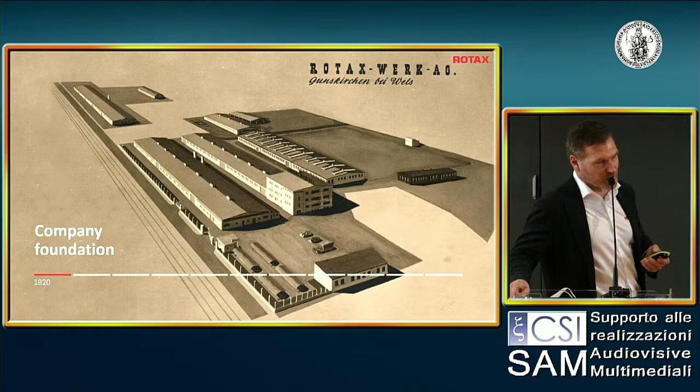We are just going through some of the most important events for the aircraft sector. There have been a lot of other events, but it would be too long to cover. So, foundation in 1920, and in 1970, the first time we made a joint venture with the Canadian company Bombardier. That was the start for the aircraft section.

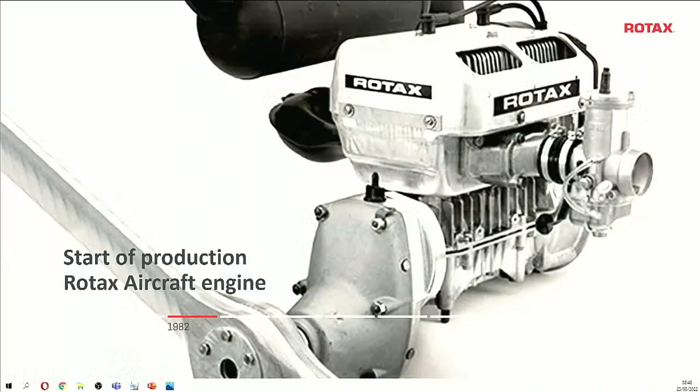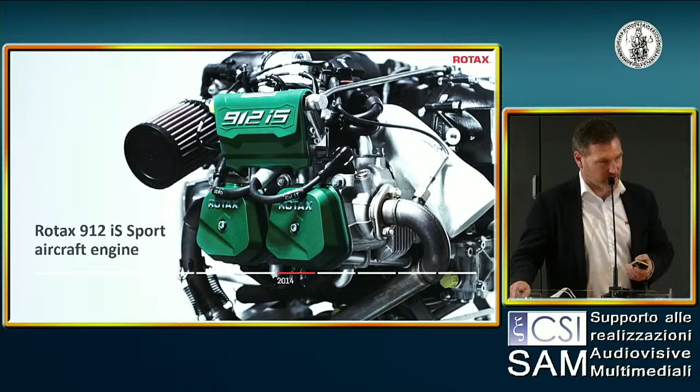In 1982, we established the first aircraft engine by itself. In 2003, there was a big change in the company structure. Bombardier sold our business out and created a completely new company called BRP. Since this time, BRP Rotax, the name, was established. In 2014, we brought on the market the first fully electronically injected engine, the 912 IS Sport, and quickly after.

In 2015, already the 915 IS engine. With this engine, we participated in this H3PS project. And of course, for our customers, we wanted to make a present in 2020. We created a special limited edition of our engine. Only 200 pieces were sold. It was limited. This edition was a 915 IS engine, but with a different style, different design, and of course included different services.

In the meanwhile, over the last 10-15 years, as we came together to become the BRP Rotax company, we became a company listed on the Toronto Stock Exchange and the New York Stock Exchange.

We get your heart beating, yeah. That is the main claim that our employees live for. That is the driver for their motivation in the daily business. We always want to get the heart of our customers beating. Since the beginning, that is what we are working for, our goals and our personal motivation.

Okay, I think pictures say more than words. So that was it, we can continue with the next.

What are our core markets? I think it has to be clarified. We are one of several engine manufacturers. Our core markets are in the fixed wing, gyrocopter, and helicopter markets, everything up to around 160 horsepower. We are not offering or servicing higher horsepower ranges. In these three markets, we have been working for 4 decades with good success.

Okay, I just want to give you a small insight into where we are focusing and what our goals are. That is the philosophy of our aircraft department from Rotax, independent of the other departments. Since the beginning, we have always focused on having the best quality, and Rotax does not manufacture an engine which is not in the end certified.

So when we are deciding on anything, it has to be premium and best quality. Next, independent of the technology, we want to have the smartest, greenest, most economical, and safest aircraft. We want to have the best service, because everybody knows we are in the 21st century. It's a century of service. Not only the best product makes you successful, it has to be a combination of service and product.

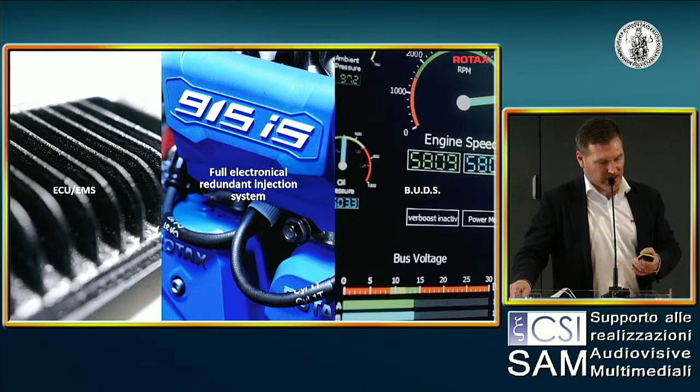That's the reason why we started, several years ago, to work with the latest kinds of technologies to make our products more successful, like engine control units, full electronic redundant injection systems, and the BRP utility and diagnostic software. That's some of many, but for the service centers and the worldwide network, we want to provide the best service to the end customer, and you cannot do everything personally. We try to maintain and educate all our people outside with the latest technology and services, for example 3D technologies, augmented reality, virtual reality. So we already have a mix, so that every end customer all over the world can enjoy the best service and the best educated people.

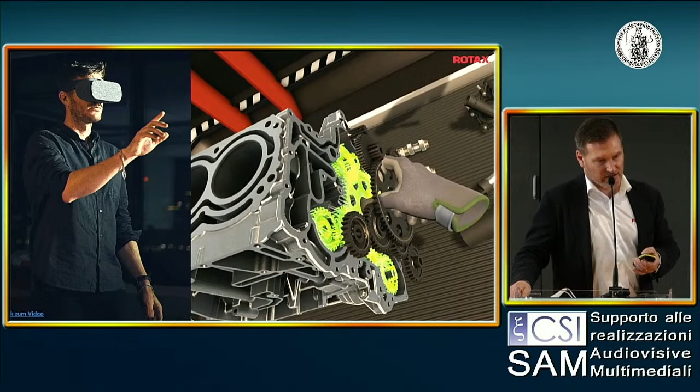So that was shortly the general information about Rotax, but now we have to switch to the main part, and I will hand over to my colleague Dominik Katholnig. Thank you very much.

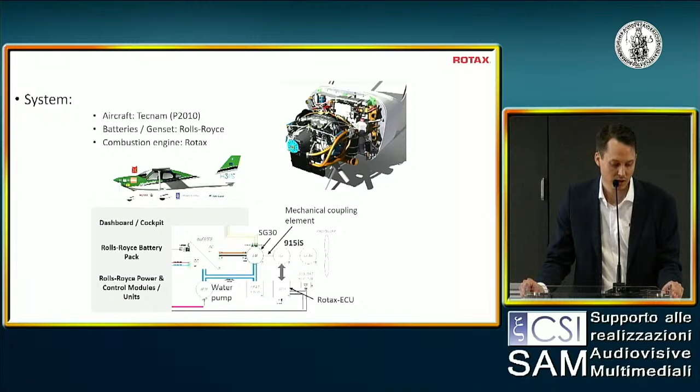On this slide, you can see part of the system architecture. How does that look like? So on the very right side, you can see the propeller. The propeller is driven by the Rotax propeller shaft coming out from the Rotax gearbox. So our engine, the 915iS, does also incorporate this gearbox.

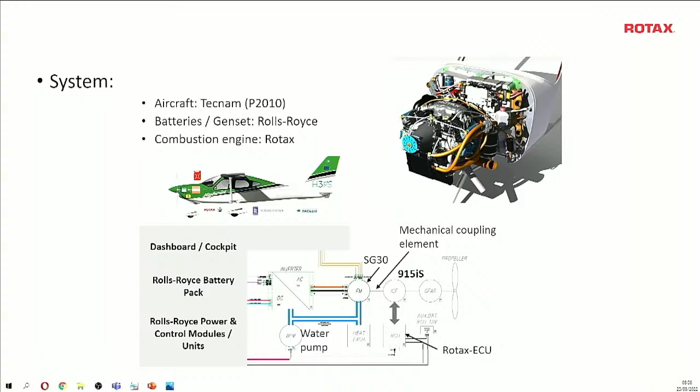And on the left side, you can see the electric system from Rolls-Royce. The electric motor is linked to the internal combustion engine via a mechanical coupling element. And so the power is transferred from the electrical machine to the internal combustion engine, and then via the gearbox to the propeller. About the left side, I will not talk about that anymore, because I will give that to my colleagues from Rolls-Royce afterwards.

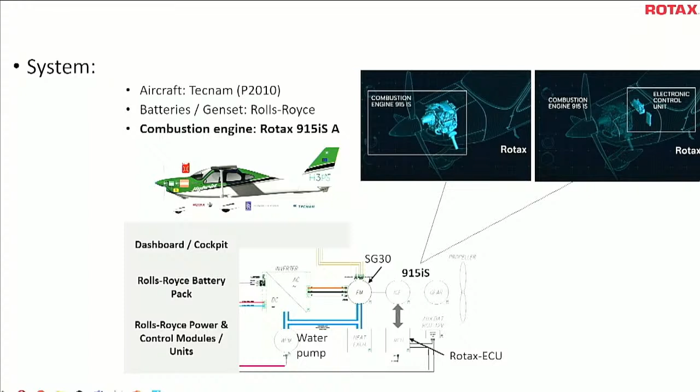Here in these pictures, you can see where the engine, where our 915iS engine is placed under the cowling. And now I come to the mission profile.

So our Rotax 915iS engine delivers 104 kilowatt of max takeoff power and 99 kilowatt of max continuous power. In addition to the 104 kilowatt max takeoff power from our engine, we have 30 kilowatts for 1 minute from the electric booster and another 25 kilowatts for 5 minutes afterwards. And so we boost the takeoff and the initial climb, and then afterwards we go to a recharging phase of 25 minutes.

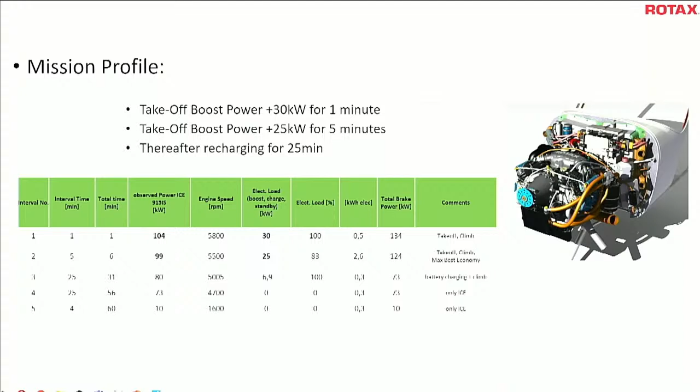Now I will come to the 915iS engine, because I want to focus on our part of this project. So what is this engine? It's a 4-cylinder, 4-stroke horizontally opposed internal combustion engine with a turbocharger. You can see the turbocharger at the bottom of the engine. With this turbocharger we have a critical altitude of 15,000 feet. It's air and liquid cooled, so the cylinder heads are liquid cooled, other parts are air cooled.

And what you can also see here in the picture is the gearbox. On the very right side of the engine, you see the propeller shaft and then the gearbox in black. And with this gearbox, we reduce the engine RPM with a ratio of 2.54 to 1 to the propeller. So if we have a max engine RPM of 5,800 RPM, we then have a propeller RPM of about 2,300 RPM.

About the performance data, we have 104 kilowatt max takeoff power for 5 minutes, and then we have 99 kilowatt max continuous power, which is most of the time also climb power. With a weight of about 82 kilogram, we have a quite impressive high power to weight ratio of about 1.3 kilowatt per kilogram. And with this engine, you can fly up to an altitude of 23,000 feet, which covers most of the VFR flight envelope.

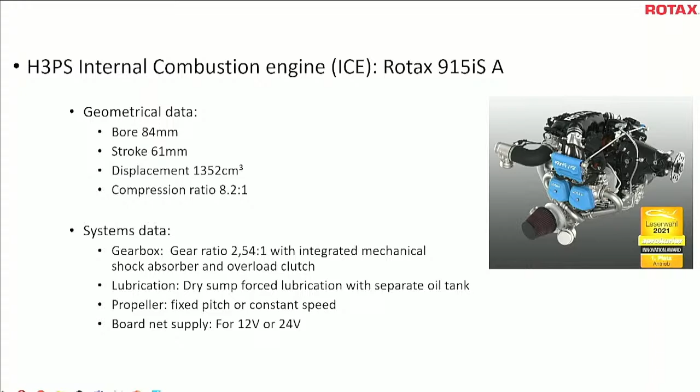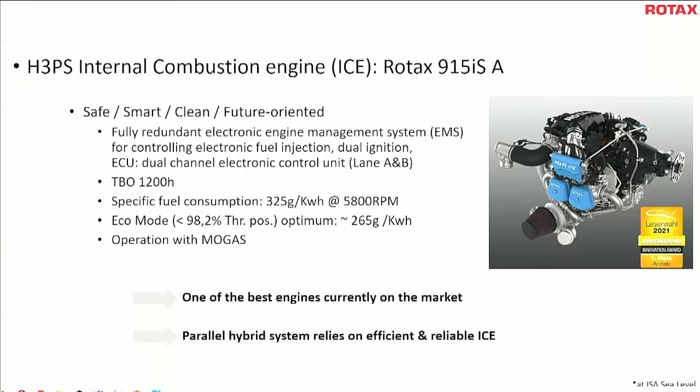Our 915 engine is a smart, safe, clean and future-oriented engine. Why? Because in the electric system and in the management system, we are fully redundant. We have fully redundant actuators, redundant sensors. We also have, as a kind of brain, a fully redundant ECU with two channels, lane A and lane B. And also when it comes to ignition and fuel injection, we are redundant.

We have a TBO of 1,200 hours, and when it comes to fuel efficiency, we are also good with 325 grams per kilowatt hour at 5,800 RPM. This is at max takeoff power at ISA sea level. We also have a lean mode, called eco mode. In this eco mode, we lean the engine, and we come down to about 265 grams per kilowatt hour.

We normally operate our engines with MOGAS, not with leaded avgas, and that is also good for our environment. This is why we consider our 915 engine at the moment one of the best engines on the market. And these are also the reasons why this engine was used for the parallel hybrid system, because you need to rely on not only a safe system, but also an efficient system.

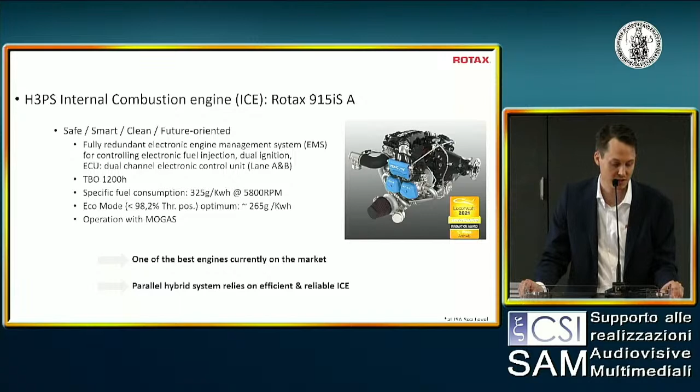Especially work package 5 was quite a challenge for us, because we had to test the engine. That means not only the Rotax internal combustion engine, but the whole propulsion unit. And I will come to that now.

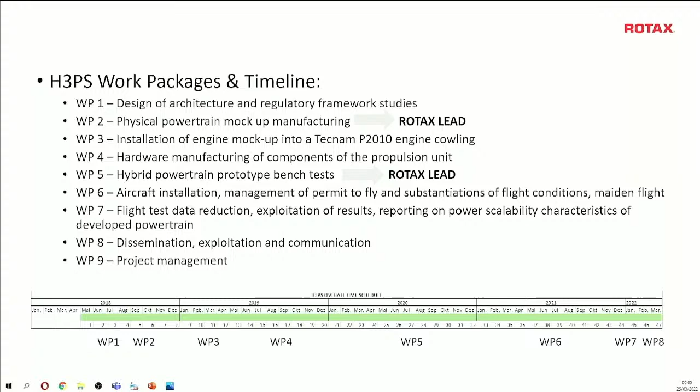Because when I'm talking about the main tasks, as I said, we provided the combustion engine, which was slightly adapted for H3PS, but the main part from our side was the technical supporting and the testing. We did 150 hours endurance run, for example, to see how the system is behaving in different phases and with the mission profile intended. And here we already saw where the weak points of the system are and which things we had to change.

Finally, we also did this on the dyno. And afterwards, before handing the propulsion system over to Tecnam, we did a 5 hours audit run to verify that everything is working properly. And we did this 5 hours endurance run on the propeller test bench at the aerodrome in Wels.

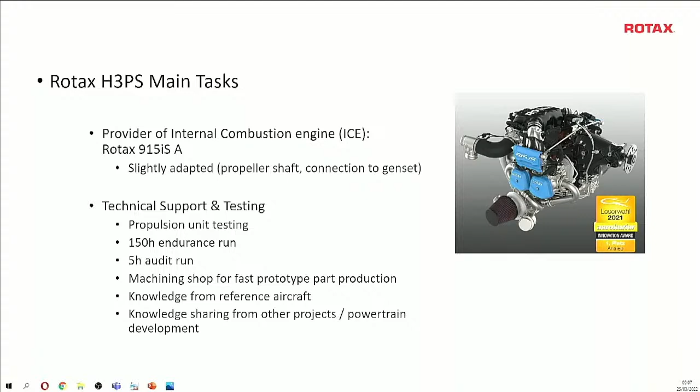What helped us also was the fact that we have a machining shop quite close to the dyno at our site in Gunskirchen, so it was possible for us to easily change some parts. We also profited from our knowledge from reference aircraft and other installations, and we could hand over this knowledge to the hybrid installation. And of course, we have other projects and powertrain developments running, and we could also benefit from that.

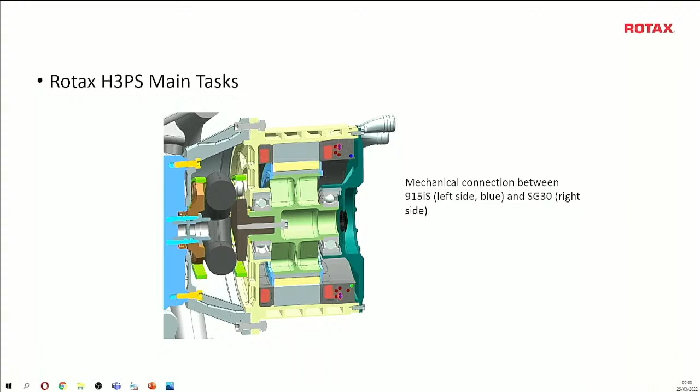So finally, to conclude, what can we say about this project from Rotax's point of view? We can say that the project objectives or expectations were met. We gained a lot of knowledge, especially in the overall system design, but also in seeing how the different systems work together in the interaction of the systems.

With this project, we had the opportunity to develop a new concept and to show how it works with a conservative approach, because we had a completely new hybrid propulsion system, but we had a mature aircraft environment, and also our 915iS engine is a mature serial engine, which helped us to avert a lot of risk in the project. We see H3PS as an important step in the hybridization of general aviation, because we also saw how important it is to have good partners in such a project, and we want to focus on that and strengthen our relationships in the future.

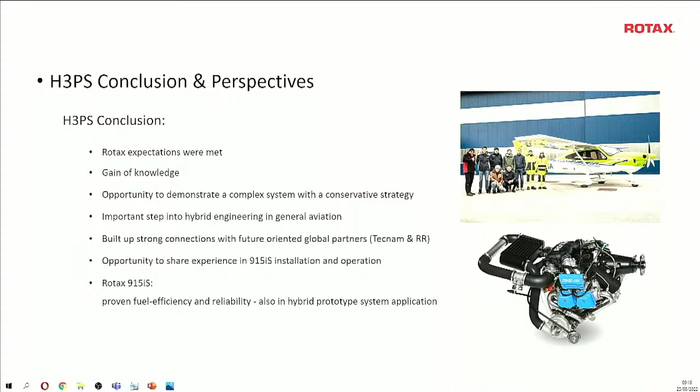For the future, there are still many challenges. As you said before, probably 5% of the way. A lot of work to do to reach maturity of these systems, but if we further strengthen our relationships, if we work together, if we really try hard, I think it's makeable.

And of course, all those system concepts have to be evaluated. We're currently doing that. The goal is, of course, to become quieter, to become cleaner, and have less fuel consumption. We want to make sure that Rotax is really pushing forward greener and cleaner aviation, and we really have that in mind. So thank you for your attention, and we're open to questions now.

I know that our Rotax colleagues have a very tight schedule, so I think if there are some questions from the audience, or from people who are not in this room today, they can spend another 10 minutes with us to answer some questions.

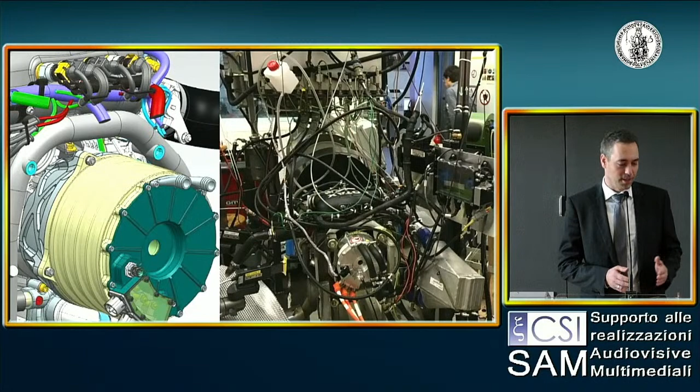So I would like to tell you a story which took us from here, from the very beginning of the concept, to here, where we could actually fly the system successfully and safely. First, I would like to share with you about our propulsion system, the electrical part of this parallel hybrid system. I would like to talk a little bit about how we could achieve that, and how modular our system is to serve various kinds of configurations. I would like to share a couple of challenges we encountered and then the opportunities out there for the future, which I think could exist in big numbers.

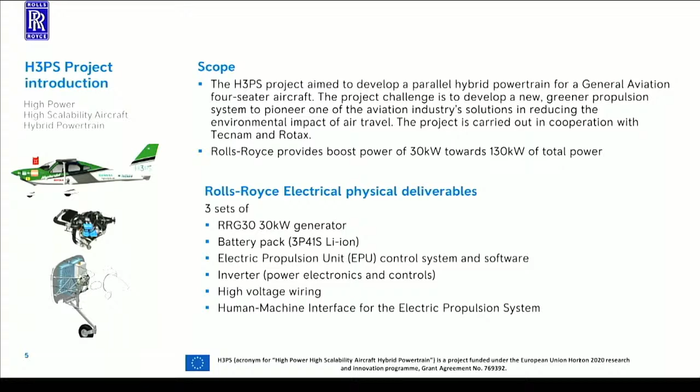First of all, about the H3PS project, I don't want to repeat what Daniel already shared. The Rolls-Royce part of this project was to provide the electrical part of the propulsion system, consisting of the electrical motor generator starter in one unit, the controls and batteries for that, as well as the wiring, human machine interface, and the entire system control, both hardware and software. When it comes to project execution, we were part of a consortium, but we had our own work packages which we had to deliver to contribute our fair share.

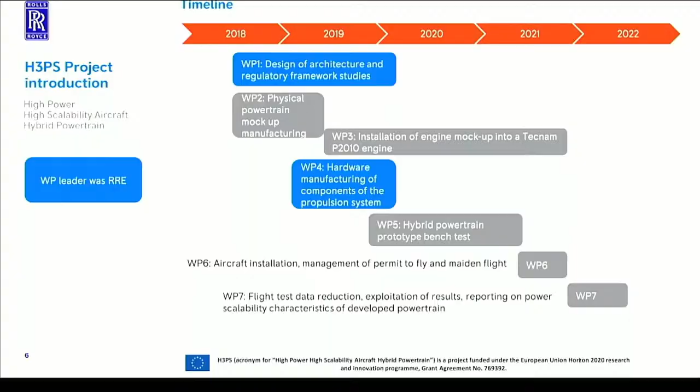I have to tell you that during the project, it did not feel like we owned one or the other work package because we worked so closely, even more closely as we progressed, with the partners Tecnam and Rotax. Yet we had two work packages: the design of architecture and regulatory framework studies, and the hardware manufacturing for the components of the electric propulsion system, where our leadership was in those work packages. So now a little bit about the electric propulsion system.

This electric machine is controlled and powered by the inverter, which consists of the power electronics and the controls, providing the three-phase alternate current to the motor to operate. The inverter gets its command from the so-called vehicle control unit. It is a torque-controlled system, the inverter and the motor together, meaning torque is the command the inverter receives. The vehicle control unit is, I would say, the brain of the entire electrical part of the propulsion system.

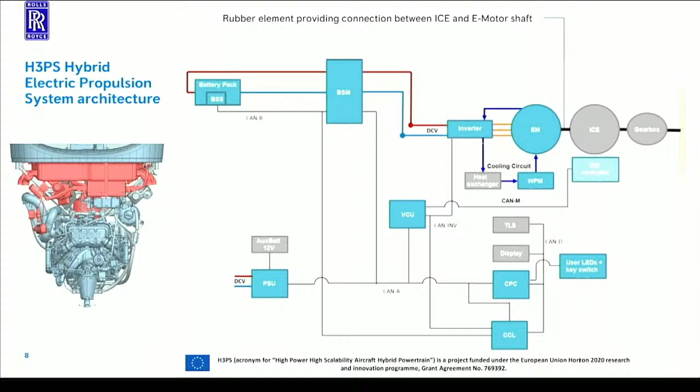There were some other things which we did not appreciate at first, and I will tell you about those during the challenges section. A couple of words about the motor.

The motor itself is an alternate current synchronous motor, sensorless, so different from typical automotive industry applications. The other way it differs from automotive applications is that it has a higher power-to-weight ratio, nearly 3 kilowatts per kilogram. And to achieve that kind of lightness and powerfulness, we had to design a different kind of machine than what you can find in, for example, an Audi or a Jaguar.

The difference is that this is a radial flux machine with surface-mounted magnets, with composite magnet retention, while automotive engines are mostly internally mounted magnet machines, which have lower power-to-weight ratio but are much easier to manufacture and design. The stator is a concentrated winding stator, and this is liquid cooled through its cooling jacket, so it's not directly but indirectly cooled. We found that it was very sufficient for all kinds of circumstances. The idea that we cool the motor in this indirect way was proven during this project, as well as some other experiments we had before.

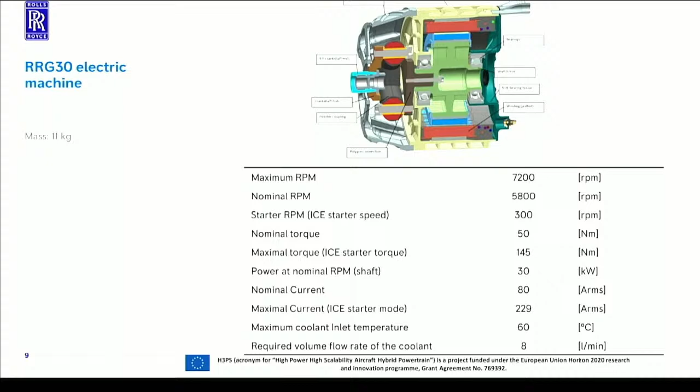You already by now probably read the data, so I won't read it out loud. I will move to the next slide, which illustrates how it looks like in real life.

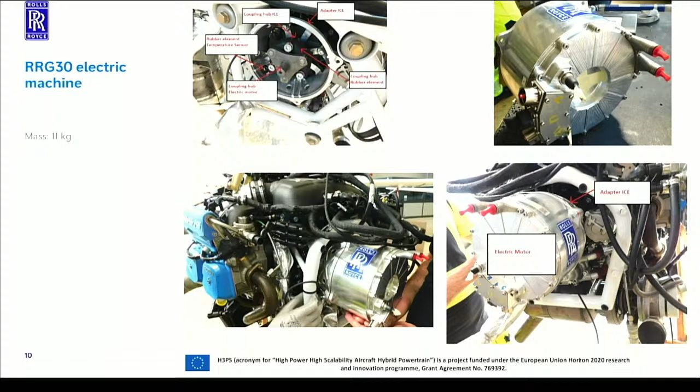What you can see in the top left is the coupling element coming out of the internal combustion engine, and this is where the motor is actually connected. The motor itself, you can see on the top right, before being connected, with liquid cooling inlets and outlet on the right side, and then the three-phase alternate current connections on the left side. In its assembled state, but still not installed into the aircraft, that's illustrated in the bottom left corner, and then eventually a close-up after the installation with the internal combustion engine.

The batteries was another specific challenge. The battery actually just serves two purposes. It is providing the boost energy during the takeoff of the flying. It also provides an energy storage possibility during cruise when the aircraft is charging back the energy into the batteries. So that's pretty much a buffer.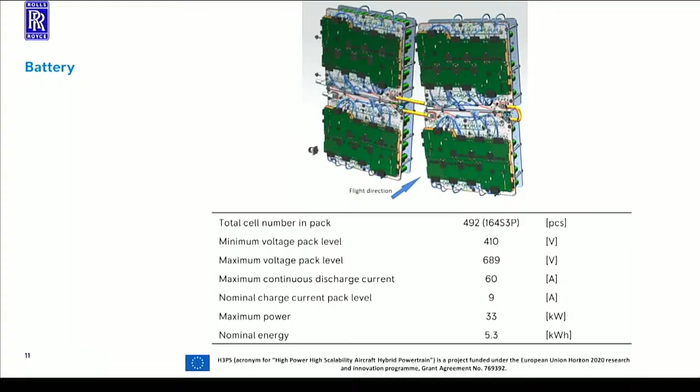This is air-cooled. Another challenge during the project was how to manage this air cooling in a way that is continuously sustained. We made lots of simulations and lots of testing in laboratory to figure out what kind of cooling do we need, what airflow, what happens when the temperature is rising. And actually, it was quite fulfilling that we saw that during flight, with the help of Tecnam and their expertise in managing the airflow, it was very well achieved, and we had no issues with the battery temperatures due to overheating.

A couple of words about the modular system concept. This was not the first time we were engaged in a hybrid system. There is a so-called serial hybrid system, which does not work with the electric machine and the internal combustion engine on one shaft rotating at the same RPM, but they are decoupled. The serial hybrid system practically works in a way where there is an electric machine connected to the propeller shaft, but then the energy is coming from a generator set elsewhere located. This enables a very good opportunity for distributed propulsion.

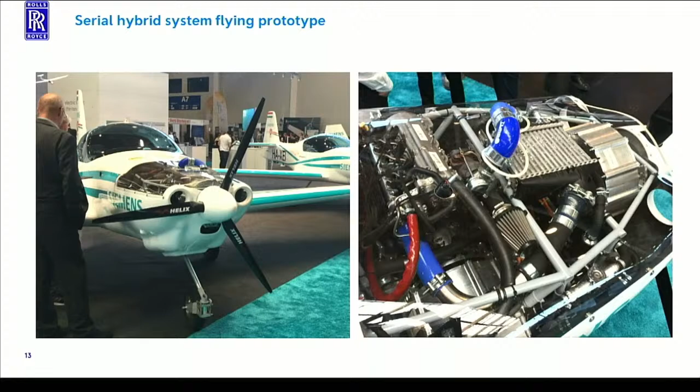So that's one of the potential outcomes of the project. As you can see, this aircraft is a real installation, and this has been flying as well. So we have that experience under our belt, but this is very different in nature than the parallel hybrid system. We could carry over some things, like for example, the architecture and the architecture components, but we could not carry over the exact setup into this project, so there was lots of learning happening in this H3PS project.

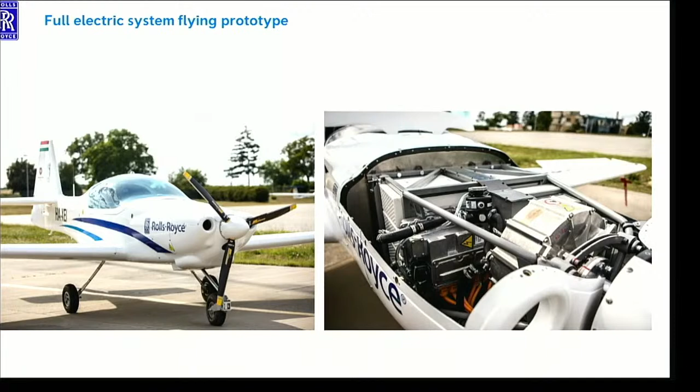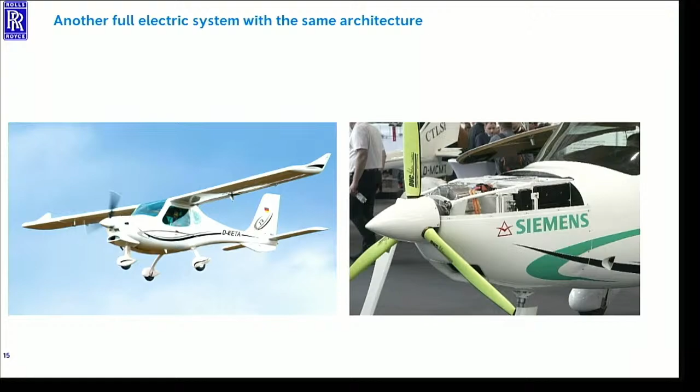The same aircraft, the Magnus E-Fusion aircraft, was installed with a full electric system, and it is actually very interesting that many of the same components we could use in a different configuration for this system. I have to mention there were other aircrafts, just to mention one here, the Flight Design aircraft, which was also using the same electric propulsion, full electric propulsion. So how is it possible that we have the same architecture for very different platforms and very different configurations?

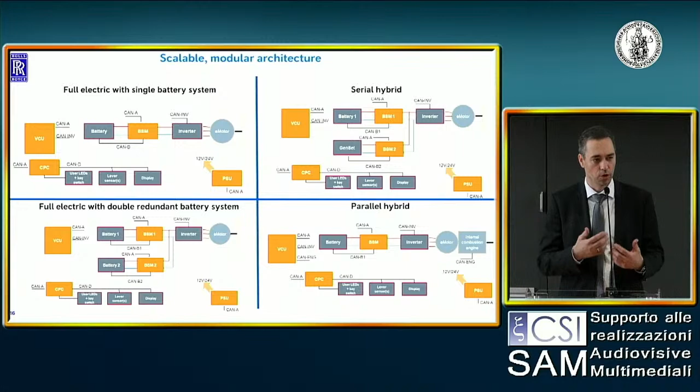The way we could manage that is because those logics and that hardware and software which we are using were evolved consciously in a way that they would be flexible. So first we started with a full electric battery system, and there we did not have any redundancies for the battery energy provided. We had that in the top left corner, and from there, consciously in mind with potential future hybrid applications, we created redundancy for our battery systems. So now on the bottom left, you can see two strands of batteries, and then if one is taken out, the other can still provide power.

It was a logical next step that we took out one of the battery energy sources and replaced it with a generator set, because the inverter doesn't care where the energy is coming from, battery or generator set, it is just electrons. So we could actually replace, with the same system architecture and components, one of the battery strands with a generator set. Eventually, we could reconfigure the same system based on the experiences and have a parallel hybrid system. Of course, it was lots of work. It's 4 years of hard work, but still we did not have to start from scratch.

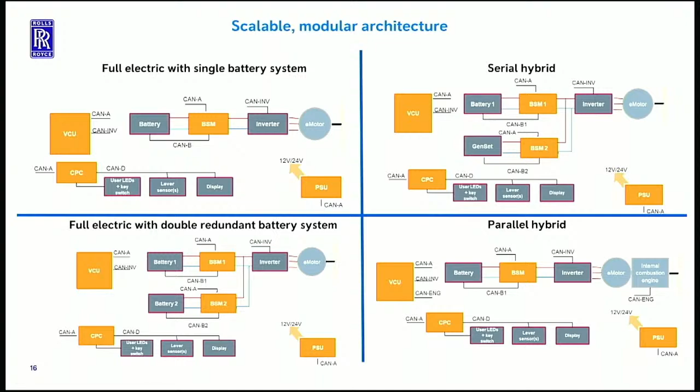So the challenges, which Daniel before me also mentioned, were numerous, but one I would like to highlight is, interestingly, the interface between the internal combustion engine and the electric motor. It's almost funny that right at the connection of the two systems, the two worlds, that's where we had one of the major headaches.

And the headaches were that it's not just mechanically challenging, but both the transients and the constant temperature thermal load on the coupling were very challenging, as well as the polygon element connecting these systems.

So what we had to do is reinforce and change the material for the coupling element, the polygon, which you can see on the right side. And regarding the rubber, we had to introduce additional cooling with the help of our good friends at Rotax and Tecnam, right into the heart and middle of this entire hybrid propulsion system, continuously cooling it during flight, and then we could achieve a stabilized temperature.

That was a very interesting learning, because this was the least anticipated problem, and it caused us almost the most headache during the project. But we solved it because of the great engineers on this job.

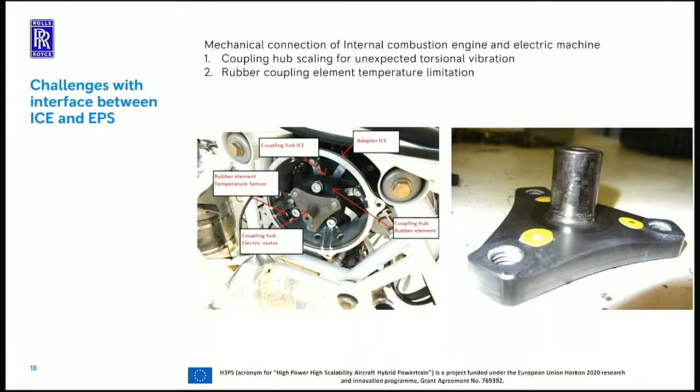Opportunities are obvious, and there are some non-obvious opportunities. One obvious opportunity is that we have announced a collaboration with Tecnam around the P-Volt aircraft, which is carrying over lots of learnings from this hybrid system. As I mentioned how flexible the architecture is, even though this is a full electric aircraft, I think that learning carries over very well into this full electric commuter aircraft.

The non-obvious learning or opportunity was really an understanding for me during the project. I remember a situation where we were standing in the hangar trying to educate the test pilot, Lorenzo De Stefano, on how to operate the system. We had very good descriptions in advance of how the Rolls-Royce system works, and very good descriptions of the Rotax system, and we gave it to the pilot and walked him through it.

Then during the walkthrough, when Rotax explained how the system starts up, we said, wait a minute, if you do that, our system will not get the right communication. So we started explaining how our system starts up, and the Rotax colleagues said, wait a minute, that's not possible, because then our system will stop.

All this, you may ask, how is it not obvious when we started to work together? Well, we had to be there, we had to start doing it in a physical environment. And then we spent the rest of the evening and most of the night, by the way, in the meeting room, going through it step by step.

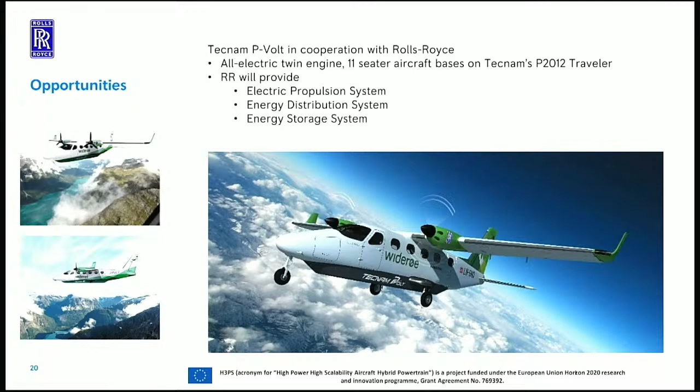But I would like to also share it with you. Thank you very much for your attention.

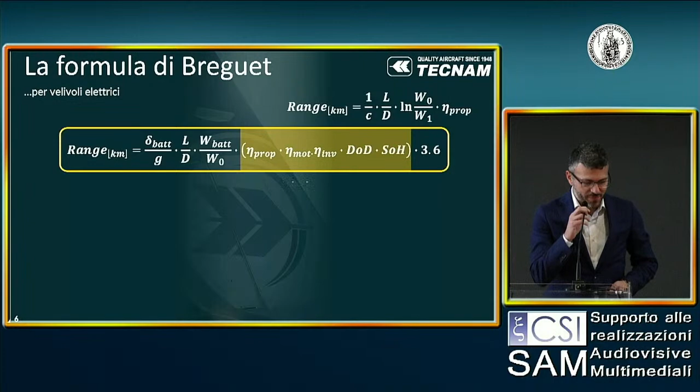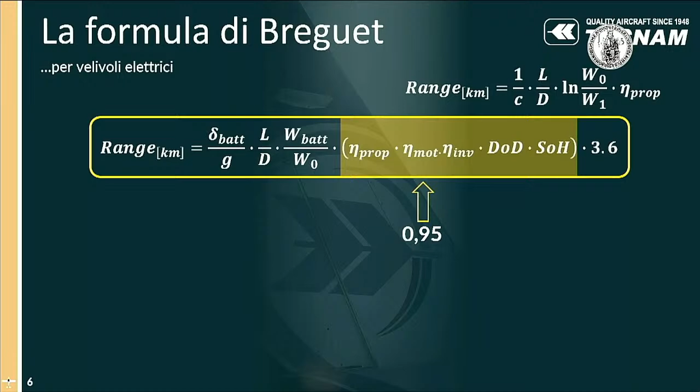Rolls-Royce can teach us, because they are the leaders in the world. They showed it 2 months ago with the world record of the fastest electric aircraft in the world. So at Rolls-Royce, they teach us that nowadays the technology exists. It's the top. Nothing is left to be invented. It's a sensational technology. It exists, it's a fact.

Good performance for electric vehicles, there's a performance of 95%. It's huge as compared to an internal combustion engine. So the electric motor is not a problem for an electric aircraft, and the inverter is not a problem. The efficiency is 98% nowadays.

Depth of discharge is the parameter that tells us what fraction of the battery you use during a flight. Starting from 100% battery and completing the mission at 0% means using up the whole battery. I take off at 100% battery and when I land it's 0%, so depth of discharge is 1.

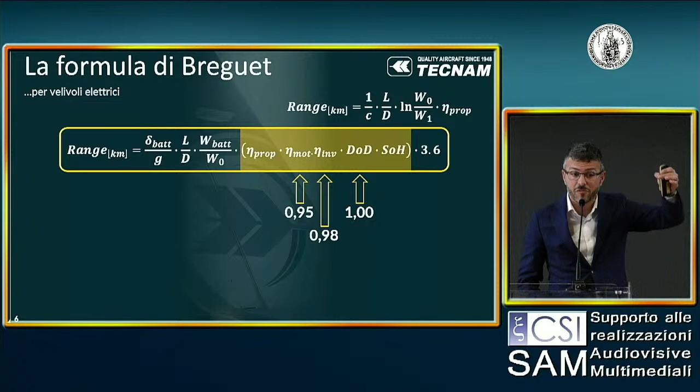With electric cars, they suggest you not to go over 80% in recharging and not to go below 20%. So that's an abnormality.

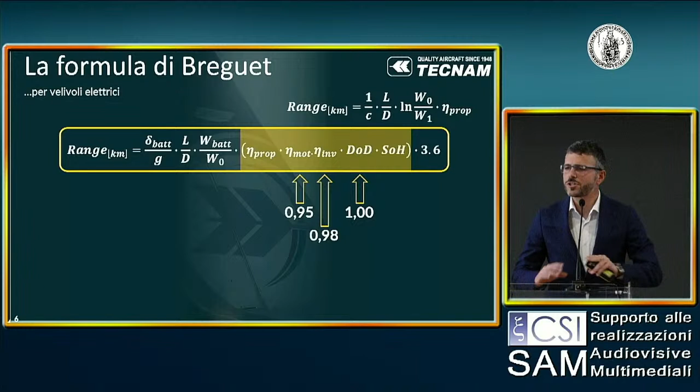Anyway, let's assume we use up all the battery capacity. And then there's state of health, SOH, the fraction of the energy that the battery can provide to the aircraft.

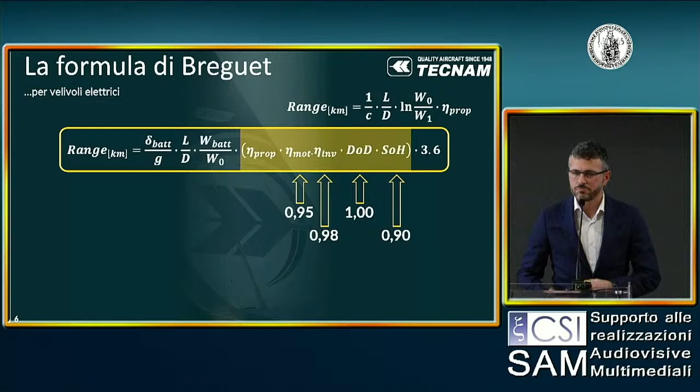So when you specify the capacity of a battery, when you give it to the end customer, you need to specify that you will lose capacity in a few months. You have to be honest with your end customers.

Cape Air does 8 flights a day with one aircraft. So 800 flights in 100 days, in 3 months. So why should we specify the range of the aircraft with the new battery when this range will diminish by 15% in 3 months? And then the performance of the propeller.

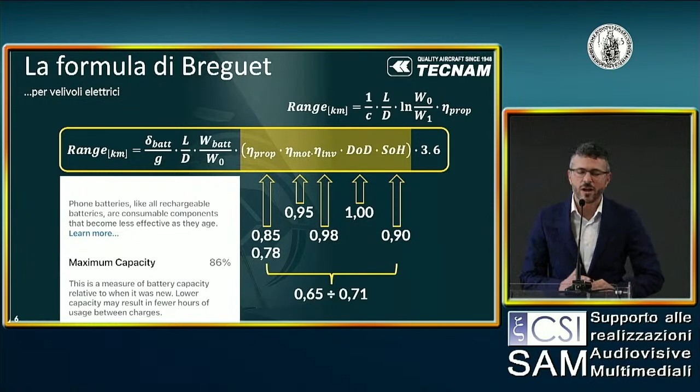So, has the aircraft anything to do with this? No, nothing. And this already tells you that whatever the aircraft, the range must be multiplied by 0.65 to 0.71. So we have reduced the range by 30% even before seeing the aircraft.

And then this is the second point. If I ask you, what is the density of the energy of a battery of a car, can you give me an answer? Do you have an idea? 200? Perfect.

250 of the cell, of course. And when 100 or 1,000 cells have to be put together in a battery pack, and this is necessary both in cars and aircraft, the weight of the pack increases for the wirings and for the container, for the cooling, the ventilation. So what happens? When this pack is assembled, it goes down to 135 to 160 watt hours per kilogram.

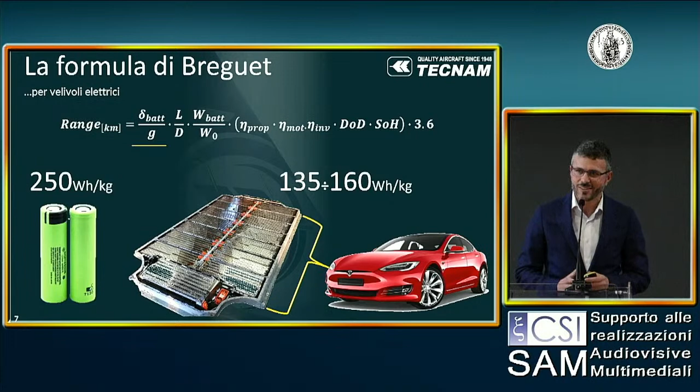So nobody thinks that the energy density of an aircraft can be the same as that of a car. As an engineer, I have to work so that we can be close to that value and not the other one. Otherwise, there wouldn't be any difference between car engineers and aircraft engineers. So an optimistic, realistic, and feasible value is 210 watt-hours per kilogram of battery.

That was the one. So now let's start looking at the aircraft. These are some dots, maybe you can see, no indications. On the axis you have the empty weight, no battery, only the airframe.

There are two abnormalities. Can you think of a GA aircraft, whether it's composite materials, aluminum, turboprop, turbofan, whatever, old or new, any GA aircraft? Do you have a name? Not necessarily a Tecnam aircraft. Give me a name.

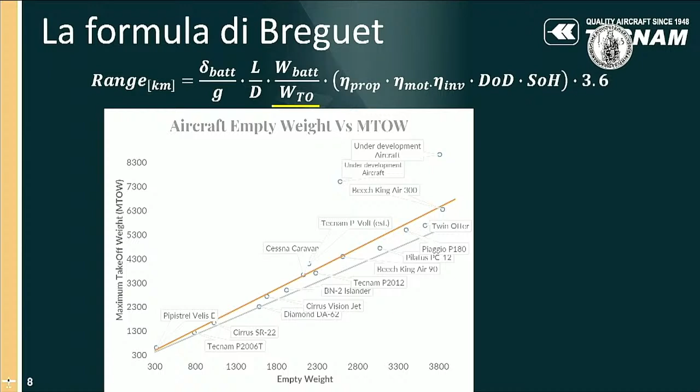Here it is, the one you gave us. Even the Piaggio P180, an excellent one, one of the best GA aircraft in Italy, falls within this ratio between empty weight and maximum takeoff weight.

Two electric aircraft exist, this is real: the Pipistrel Velis is likely outside this boundary, and also the P-Volt. Well, actually the P-Volt also falls outside. These electric aircraft have a lower weight than the others, slightly lower.

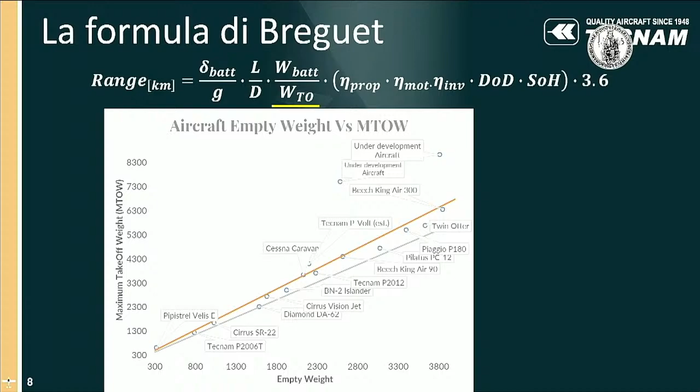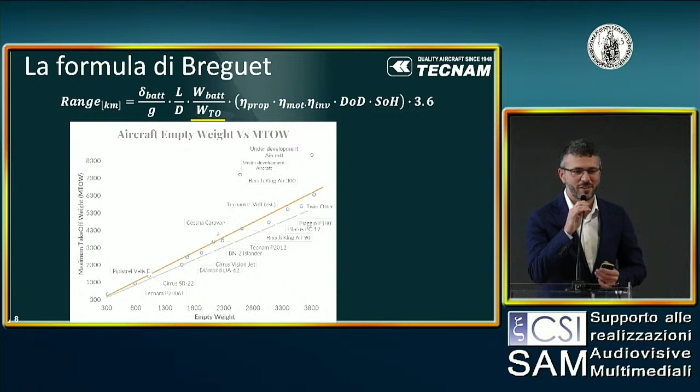Here's another formula: maximum takeoff weight minus empty weight minus payload rated, declared, etc. In all these cases, the fraction of the battery that you can put on board with respect to empty weight and maximum takeoff weight is this one, 0.29 or 0.35.

Otherwise, you end up building an aircraft that cannot transport any passengers.

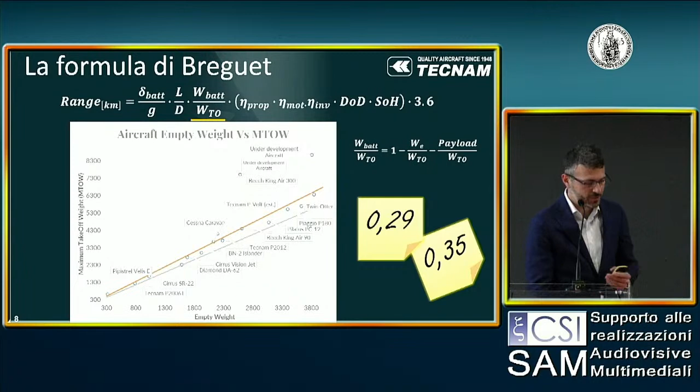Maybe those who are following me on LinkedIn are familiar with this image. This shows the curve of aircraft efficiency, lift and drag, the ratio between lift and drag versus speed. You have to consider this when you read announcements. They publish the range of the aircraft and the speed of the aircraft as if that range could be obtained at that speed. But if this is the maximum L/D ratio, when you are at high cruise speed, the L/D ratio you use for the Breguet range equation is different.

At a fast cruise speed versus a maximum efficiency speed, there is a difference, a 35% reduction of the L/D ratio. This is another tool to better interpret the announcements published on social networks.

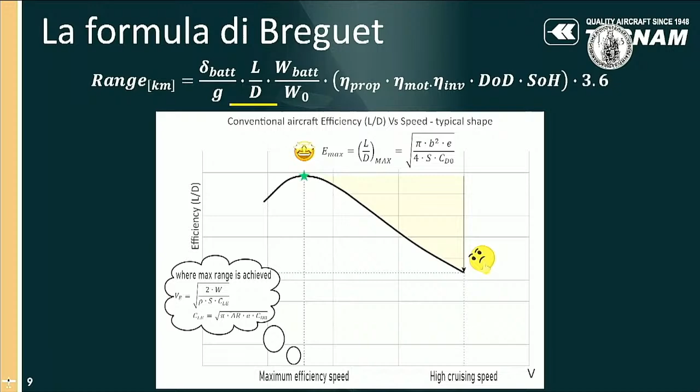This is a tool to interpret. So even if we assume very high Oswald factors and drag coefficients like 0.025, 0.023, even in those cases you realize that all the press releases we read are fake. It's very easy, pretty straightforward.

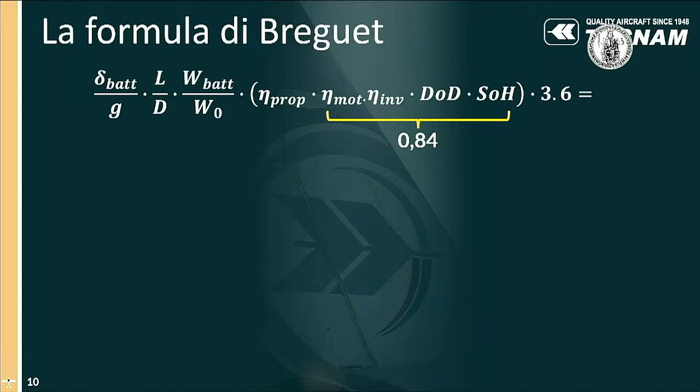So what is my conclusion? We had already seen this: there is a group of values less than 1 that make us lose 15% of range. All the possible combinations of standard efficiency of a GA aircraft, and we were very good at obtaining very high efficiency, then the battery mass to maximum takeoff weight ratio, propeller efficiency relatively good, etc.

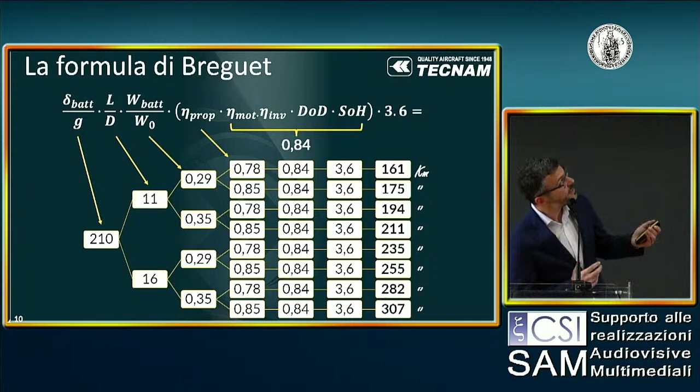In all these cases, we are very far from the ranges that are communicated and promoted in the press releases. If you have an aircraft that flies at 200 kilometers an hour at cruise speed, and you want a half-hour reservation capacity, backup capacity, you can do it, but the values are reduced.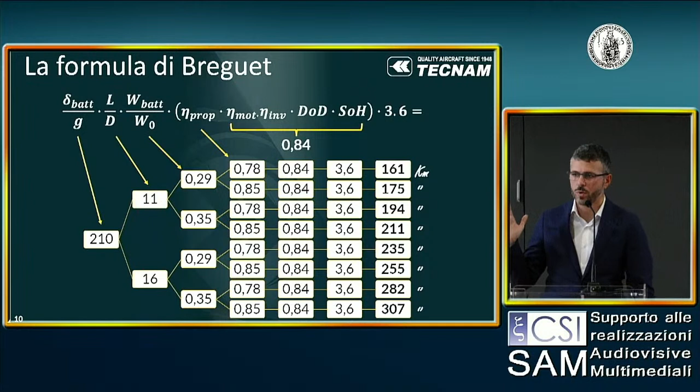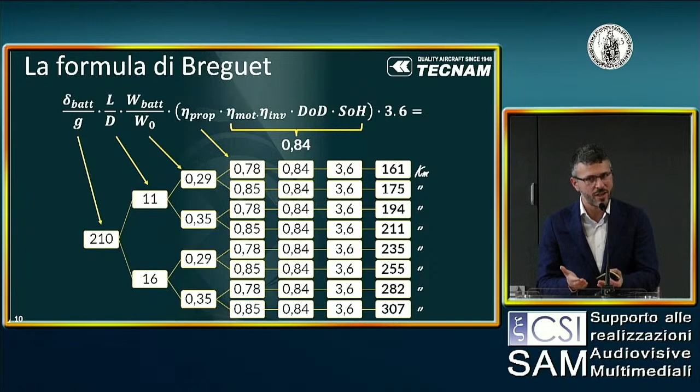So you have to be honest with your customers. When they come and say, why does the P-Volt do 110 nautical miles, I have to tell my customers that what they are buying is not true. It's not feasible nowadays.

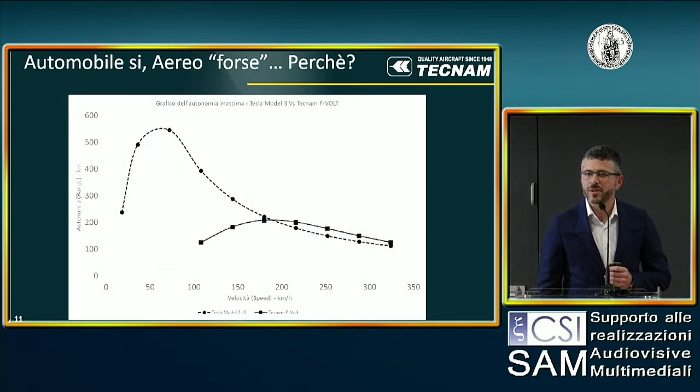This is another exercise to answer the question: why does Tesla do 500 kilometers range and we can't do it with an aircraft? These are the two range curves, Tesla and the P-Volt, without considering all the rest. At a certain speed, the aircraft has a good range, better than Tesla.

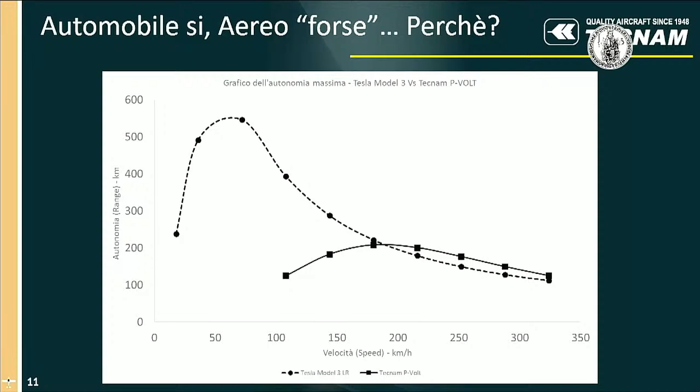An aircraft transporting 11 people has a better autonomy than a 4-seat car. But the range of an aircraft can never equal that of a car, because the drag doesn't allow us to fly at low speed. And in the aircraft, we need to consider the backup for every flight that is planned.

We have a certain experience, and we can be very critical, and we can evaluate the potential evolution of these engines. H3PS has been a very interesting and revolutionary project.

We have demonstrated that a hybrid engine can guarantee the same payload on the same aircraft. With the Lycoming engine and the hybrid parallel engine, this value is the same. We have also demonstrated that consumption and emissions can be reduced with this configuration, also because the Rotax engine is much more efficient than a Lycoming.

In our latest flight, I was flying a standard aircraft, and our testing pilot was on the H3PS flight. My consumption was far higher than his, so there is a difference. But can we really say that it can be put on the market?

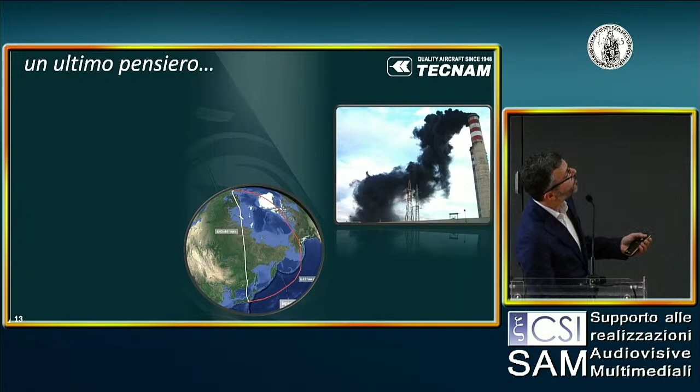And then every time I see flight radar, I see these tracks. This means that every day hundreds of flights, in order to avoid Russia, fly more hours. Now 12 hours to do what they used to do in 8 hours. So we have to wonder

what is really legitimate now. We should also be peaceful. We can protect our planet only if we are all in peace, if the world is in peace. If you want to download the presentation, it's a little booklet where I explain all the passages to demonstrate the range equation for electric aircraft. So thank you very much for your attention.

Grazie. Vabbè, ma io ero preparato, quindi... You know, I knew, I expected it.